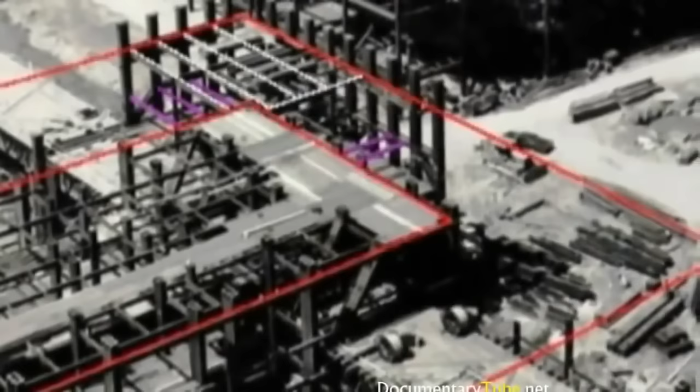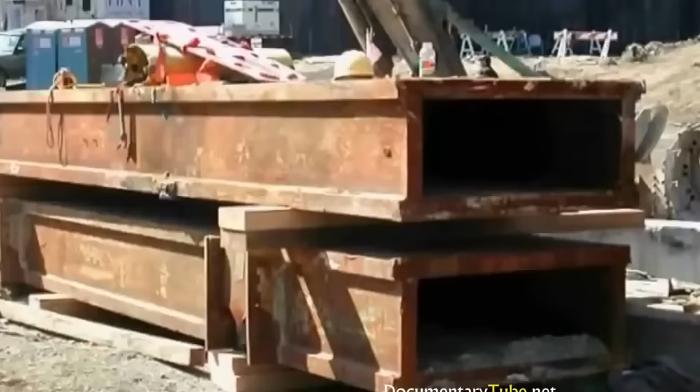The cores themselves, if you've seen diagrams of the building, there's a large central rectangle in each of the towers that contained 47 columns. And these columns basically were the primary structural support of the building. They were given the role of supporting the whole gravitational load of the building. Since they were so strong, it would have been reasonable to think that they would have withstood, at least to some extent, the collapse. But in fact, as we see after the buildings collapsed, there was basically only little stubs of these things standing up a floor or two above the ground level.

The cores did not have much in them that would burn. The cores basically were dedicated to things like elevator shafts, utility shafts, stairways. So you have drywall material, you have a little bit of carpeting, you don't really have any inflammable material in the core itself. The core was specifically designed so it could not function as a chimney. They did not want, in the case of a fire, for the fire to be able to travel through the elevators or for air to come in through the elevators.

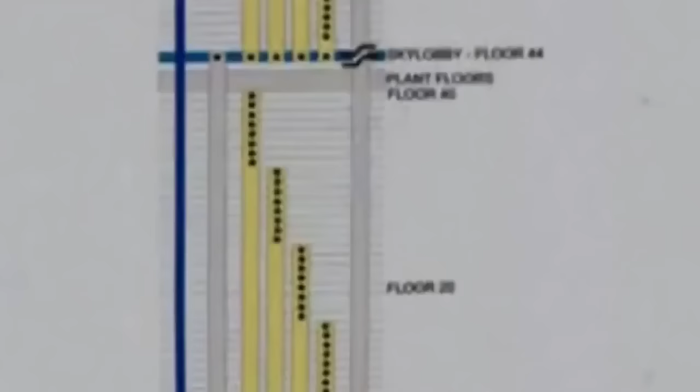So they were designed with what this architect Aaron Swirsky, I believe it was, referred to as a hermetically sealed system. There were fire shutters that were designed to close off the core in the event of an event like this. And those, as far as we know, functioned properly, which means that there was a very limited amount of oxygen available.

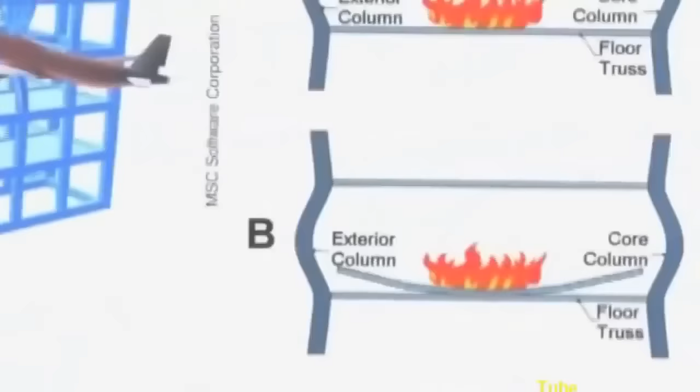Okay, as far as the issue of what failed and how, some of the initial suggestions, and these showed up in the NOVA documentary, which is a good example of what I like to call proof by computer animation. Thomas Eagar, who was a material scientist but not a structural engineer, who became a spokesman for these documentaries, indicated that the floors had somehow failed, that the trusses supporting the floors had failed. This was the theory that was put forward actually in the initial FEMA report.

Subsequently, there have been basically complete contradictions of that. Jim Hoffman has done quite a bit of research which is available on the web concerning the problems with this idea that the floors would have simply fallen. There was a study done by Weidlinger Associates. The chief engineer there was Matthys Levy, who's a very well-known authority on building collapses. He specifically disavowed the idea of pancaking or collapsing of the floors.

And the most recent official report we have on this, which is from the National Institute of Standards and Technology, NIST, rejected the idea that floor collapse was part of it. And so as a result, we have basically no sequential model at this point.

What NIST has suggested is that there was some kind of simultaneous collapse of the cores, but they have not attempted to give any kind of modeling as to whether those cores could have in fact been destroyed by the fires in the way that they claim. Unfortunately, the material that would have allowed a detailed fire analysis, the actual physical evidence, is all gone.

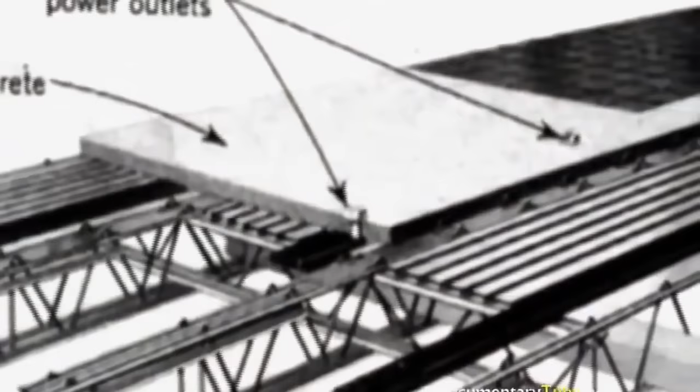And the common thread is that you have large amounts of a dense material that is suspended very quickly in a fluid, thereby creating another denser fluid, which is in effect the dust cloud. And that fluid can achieve considerable velocities. The problem with creating this sort of slurry of fine particles is that there really is no mechanism that has been proposed. We have concrete floors with carpeting or flooring over them. We have furniture. We have floors basically that are coming together in a collapse, but the concrete is basically protected under these layers.

Early in the collapse, in the very first moments, we see these thick clouds being ejected at very high speed. They're clearly dense because they flow downward and become part of this large overall pyroclastic flow. What we're basically being told is that the concrete sort of jumped up into midair, exploded itself, and then was ejected as the floors came together. Not a very plausible mechanism, but I have yet to hear of anything else proposed to explain it.

From quite a few people on the scene, we've been told that the powder represented most of the concrete, that the amount of intact macroscopic chunks of concrete on the scene were negligible, that basically everything was reduced to powder. And incidentally, we also know that other things besides concrete were reduced to powder. We know that contents of computers, exotic metals from computer chips, these sorts of things were also identified in the dust and in very small particles, generally on the order of less than 100 microns in diameter. So we have a real issue of mechanism as far as what in the process of this collapse could cause so many things to be pulverized so finely.

For the towers to collapse the way we saw them collapse basically implies that the columns simply collapsed into themselves. They telescoped straight down. Steel keeps a lot of its structural integrity, even when heated. Until you begin to approach the melting point, you don't really see a catastrophic loss of strength, and this is what we're talking about. We're talking about basically vertical box columns collapsing into themselves, which implies a complete loss of mechanical strength.

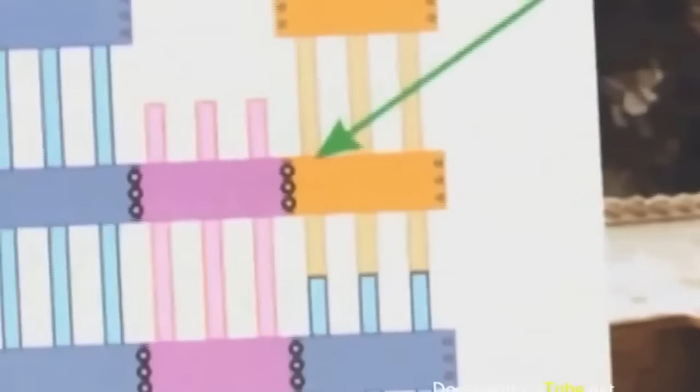And as far as the initial impacts, this recent NIST study made an interesting point about World Trade Center 2. The film analysis showed that it oscillated for about 4 minutes after it was struck by the airplane, and the oscillation rate was identical to what would be expected for the intact tower. Trade Center towers and most modern buildings are heavily redundant in the sense that the load bearing can be shifted to other members if some of them fail, and we saw that happen in this case.

Stresses do redistribute, but absent further weakening of the structural members, that distribution is limited. It happens, the structure restabilizes, and unless there's significant further damage, it doesn't progress to a total collapse. World Trade 1 began collapsing from the very top after an hour and 40 minutes. It's very hard to imagine office contents progressively heating up hotter and hotter over that period of time. And for a building to collapse from the very top, which is the least heavily loaded, is also very odd, to say the least.

Just a couple of other anomalies. As we know, there were reports of explosions. There were reports of underground explosions in both of the towers at the time of the impact from a building engineer by the name of Philip Morelli. There are interviews with him on the web. From the Naudet brothers film, 9/11, we see that the lobby of the North Tower was extensively damaged with what looks like high explosive blast damage, and this was immediately after the plane collision.

But we know that on the weekend before, there were power downs, and there appear to have been evacuation drills going on throughout the previous week, which suggests that at least some people knew that something was happening. The power downs may represent a time window in which demolition charges would have been planted, although I think it's possible that they also were planted over a much longer period of time, given the relative accessibility of the buildings.